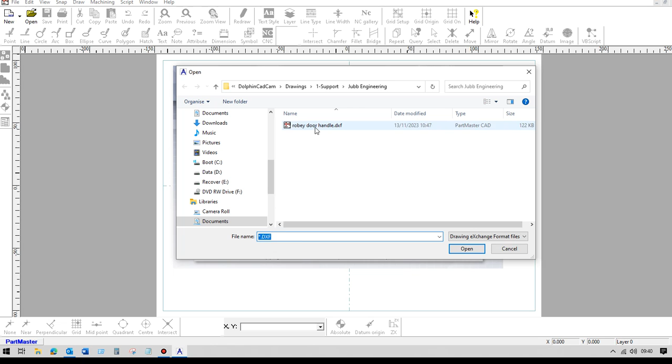So I've started the CAD system, which is the best place to start when you're importing DXF files. So import the DXF file, which is this one here, and we're in millimeters.

Okay, so that's the file. A couple of things we should do with that. Firstly, we only need to have a profile which is either above or below the center line. So to do that, if I create a line and use near snap to snap onto the datum position there, then I can use intersect with split to split that arc where it hits the line.

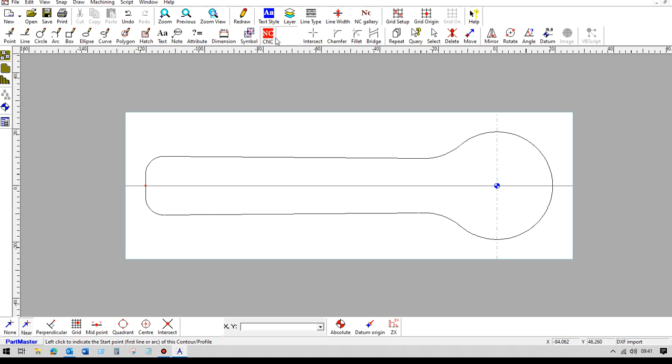Now I can create the profile which we use to take through into the turning software. So to do that, we use the NC button here, so we can see where the default datum position is from the DXF file, but we need to move that, so we use the set NC datum command here, and then we'll set our NC datum there, so that becomes Z0 X0.

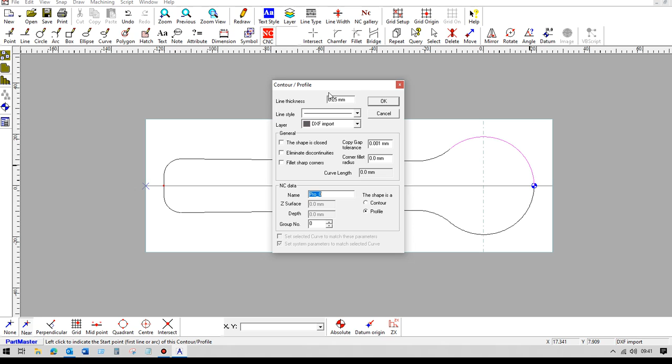So now we'll produce a profile which will start at this end here. I can leave the defaults as they are, but it needs to know where the end point is, which will be this position here. So that has created that as a profile. So we save that away.

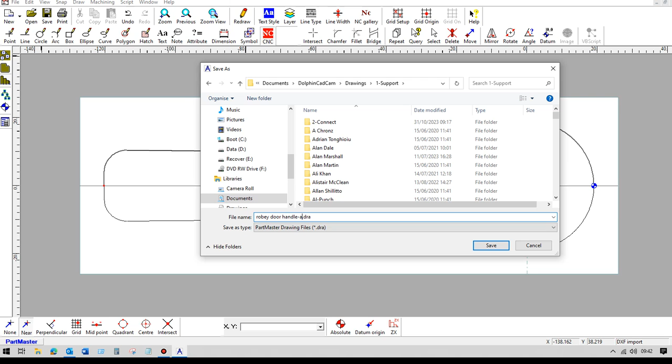And then we can take that through into the machining module. So because it's a new job, we can check our tool change position. So if we're using a front or a rear turret, then we can set up the home position here. So what we need to do is to define a tool.

So we use the bottom toolbar here. So we can use a button tool to machine most of that, and set the tip radius and the Z and X offsets, and then the tool can approach from the rear and is probably mounted on a rear turret.

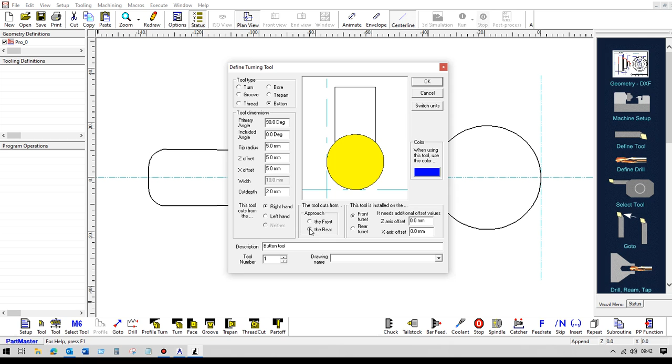So now we can select that tool for use, set the spindle speed and the feed rates. So we can use feed per minute or feed per rev, and if we want the coolant to be switched on, we use that here.

So now we can do a facing operation or a turning operation for roughing out. So we use the turn macro. So this is defining a rectangle which will be where the tool will move between. So we probably want to start off here. So that's the top right corner of the rectangle, and the bottom left corner will be here.

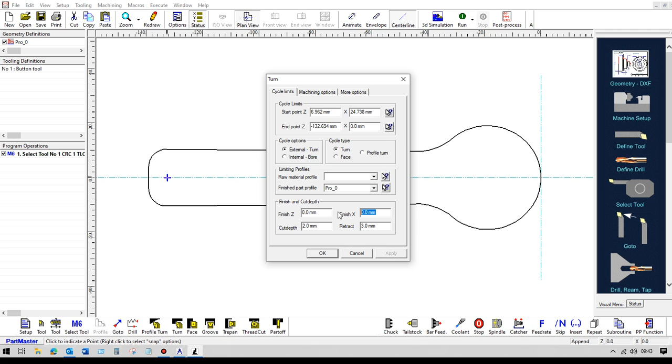I won't go right to the end because I might need to do that in a separate op. So it's going to be limited to the part profile. If we want to, we can leave a finishing allowance in Z and X, and we can set up our cut depth.

So we might want to use a facing operation. So we can start somewhere here and finish about there. So I won't go right down to the center line, otherwise we won't have a chance to do a finishing operation on that. Okay, so that's just machined round there. So that's got that part.

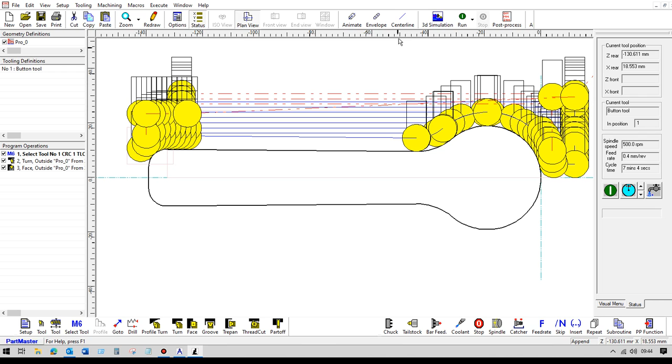Now we can use a profiling operation to take off any finishing allowance that we've left on. What we could also do is the tool, when it's finished this last part here, will end up here.

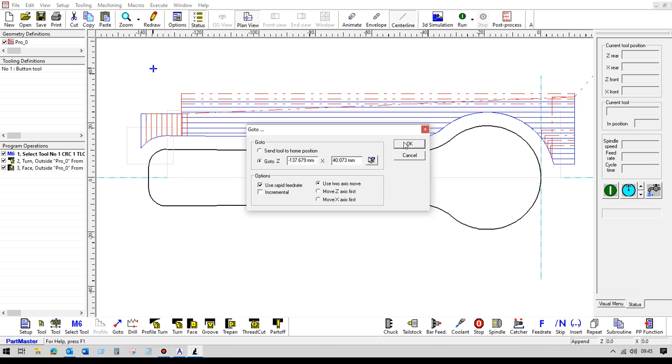So we can drive the tool to a safety position over here. So we can move the tool up to here first of all, using rapid, and then we can send the tool back to this position over here, again at rapid. So that moves the tool clear of the job, so that if we're using the same tool for the roughing and finishing, then in the profile operation the tool will be over here so that it can machine all the way around there.

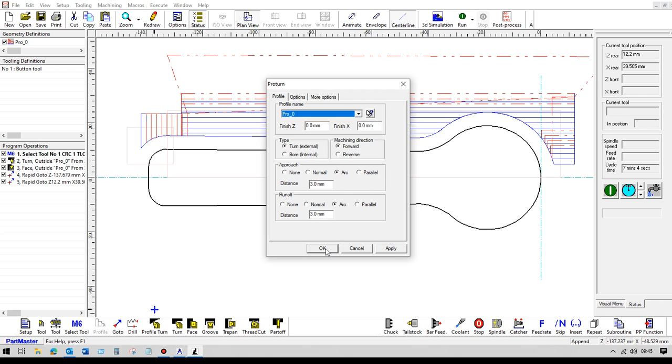So we'll use the profile turning operation, and I'll leave all the options as I need them to be, and if we just click OK, right, so that's produced a finishing operation with an arc approach going all the way around here and then round to the end. So let's just save that file away.

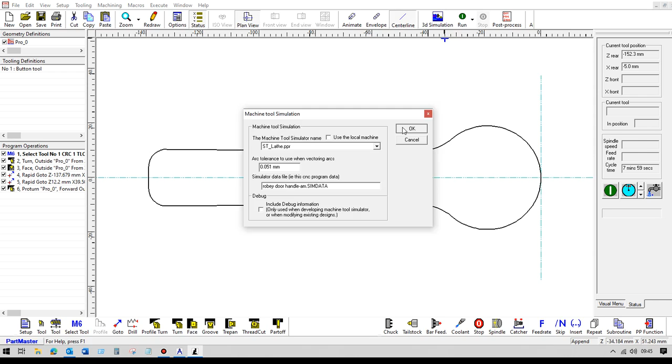And now we could post-process that, or we could take that through into the 3D simulator. So if we run the simulator, we're running a lathe, so that calls up the simulator and it passes the data through to it. So we can leave all of these defaults as they are, just click OK.

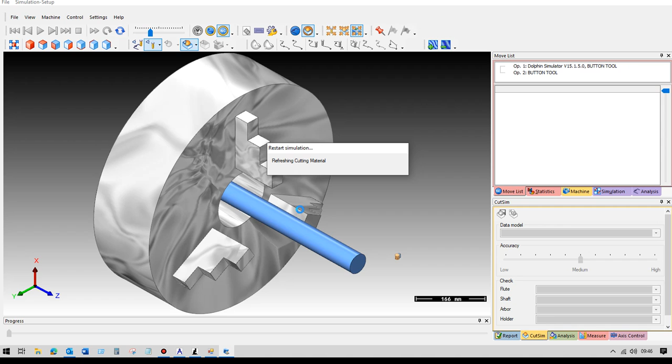So the bar stock that you see loaded here will be just created from the extents of the toolpath. So we can see the button tool there and the video controls at the top here. And we can control the speed of this simulation.

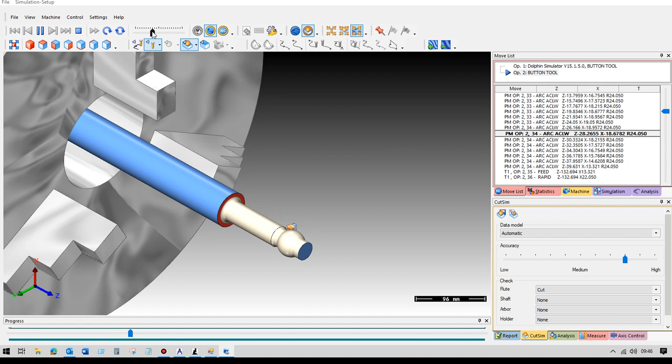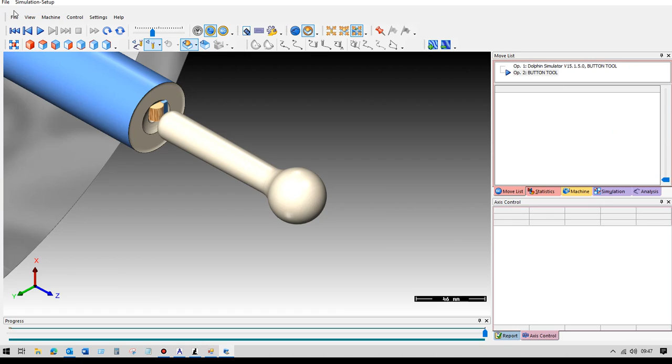Okay, so that's machined that. Obviously we need to do something a little bit extra on the end there, so that it doesn't foul the tool when it's machining that last part.

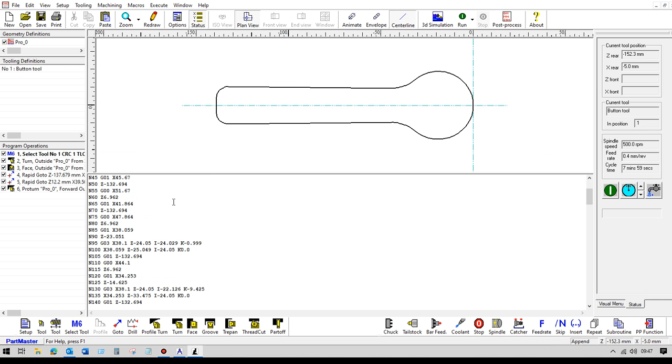So that's the main part of the program, post-processing that. This is for a FANUC control, and it produces the G-code file here, and so that's the file that's produced. So you can send that through to the machine tool. So that's that.